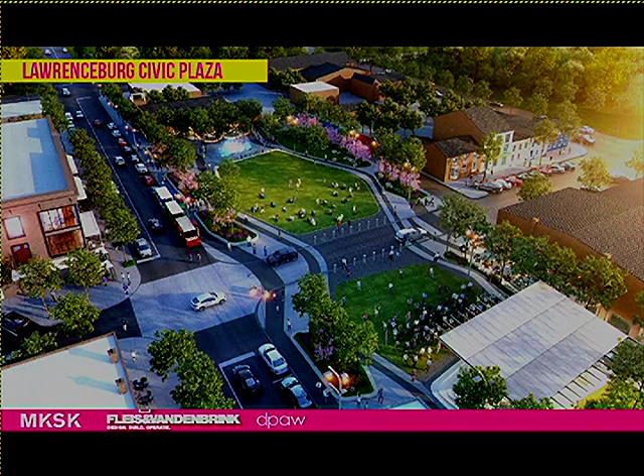The site that the project was in was actually 2 parking lots, and they utilized this for concerts. They had a summer concert series, and they really needed a space not only to host those events, but also for daily activity and just green space—kind of the lungs of the downtown area.

So we went through a process where we developed 3 different ideas, working with the community, kind of inspired by it being a river city, inspired by the way that the water flows through the area, through the sound that flows through the space.

Without getting too deep into that, these are some of the design ideas, and these are some snapshots from a couple weeks ago on site that I took, beginning to look at water features, how we deal with trees in an urban area to ensure that they're going to grow in a healthy way.

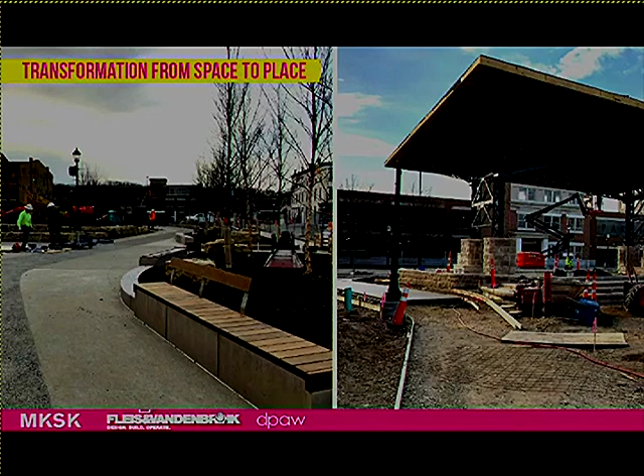We also had a stage here. I say stage because that's kind of a recognizable word, but we designed it as a pavilion so that when an event wasn't going on, it didn't look like an unused stage. It invited people in, so it really took some cues off of some of the river traffic, the railroad bridges that go over the river, beginning to reflect some authentic character in the area.

Another park is Livingston Avenue. Our Casey Elmer, who's with me in our Louisville office and will be critical on our design team, was a project manager for Livingston Avenue Park.

This park is not only one that you participate in, but it's also something you look down upon as well. You can see the tall building next to it, similar to the city center that's next to our site here. So it's not only something beautiful to participate in, but something to look at, and also reflecting the community. There used to be a park here.

It had since been developed around and had been impacted until we got involved in beginning to reflect the history of that park. So we have signage and wayfinding in-house that we've also got some hours for on this team to participate, and if there are stories to be told, we want to figure out a way to get those integrated into the project. So we think that was something of interest to that project.

U Square, downtown Cincinnati, a little bit different because this is a much more dense site, but it had a very aggressive program. How do we begin to develop a space around a program that's both flexible and engaging?

A few of the project images here show how it acts both in the daytime and the nighttime, how it embraces not only just a few people but also a crowd of people. This is adjacent to University of Cincinnati, so it has to embrace the crowds of people before games, the tailgating, that kind of thing. So that was something we had to work into the program.

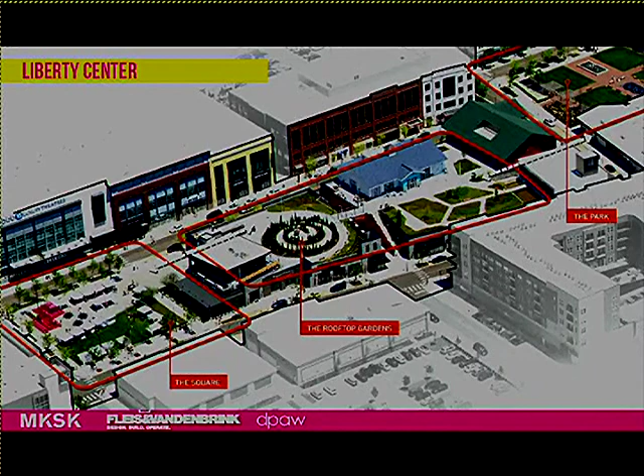Liberty Center, another project where Casey Elmer was heavily involved. I'm going to focus on the square and the park. This was a very complicated project, part of a larger development. We also did the roofscape there, but I'm going to focus on those other two areas.

We've got the park area, which involved a water feature, also some sculpture, a little bit more passive where people can congregate during eating, shopping, those kinds of things. We also had the square, an opportunity to be heavily programmed for concerts and those kinds of things. Both these lawn areas were very porous, so we could deal with stormwater on the site, which is something very interesting on this project.

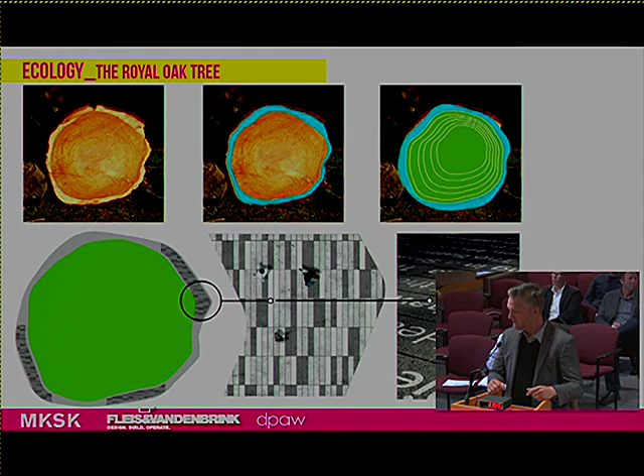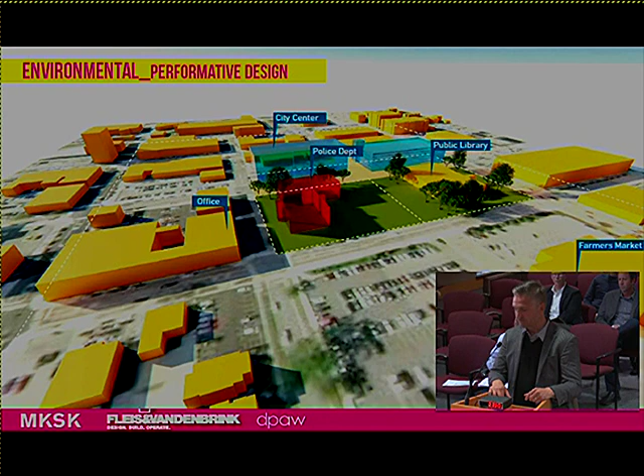Innovation and sustainability—one, there's an existing building on the site that will be slated for demo very soon. Is there an opportunity to utilize the basement space, not fill it in, and take it back out later? We could possibly use this for stormwater storage.

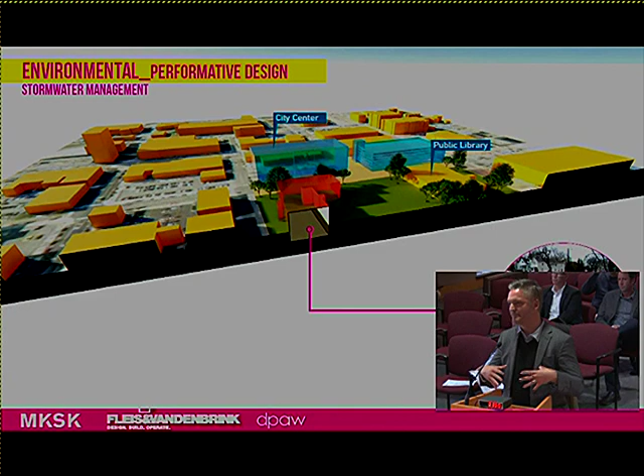One of the challenges we want to give ourselves is to create a site that not only has net zero runoff, but can also absorb rainwater and stormwater from other sites. Most immediately adjacent would be the streetscapes, but what other areas could we also plug into? That's something we'd want to work on not only with our project and the task force, but with other folks developing around us.

Tree canopy—obviously the urban heat island effect. When you look at Google Earth, you see a lot of gray, kind of void of green in that area. So this is an opportunity to insert a lot of green, so it acts as a magnet. A lot of our green urban parks operate as an anchor not only to downtown areas and the people there, but also to future development. So that's something to think about, and its importance.

Also habitat creation—little things you can do, like putting milkweed in a wildflower area, now you're pulling in butterflies. That's an additional layer that's not only helping the environment but is also educational, something you can come and watch during the seasons.

Social—number one, there's daily activity, right? People are going to come use the space for lunch. I'm starting to show there just some placeholder things with the blue ring that goes around.

Maybe that's kind of a reflection of that tree ring, that circular path. We've got a few yellow paths through there that may reflect something like a crossroads from some Native American trails.

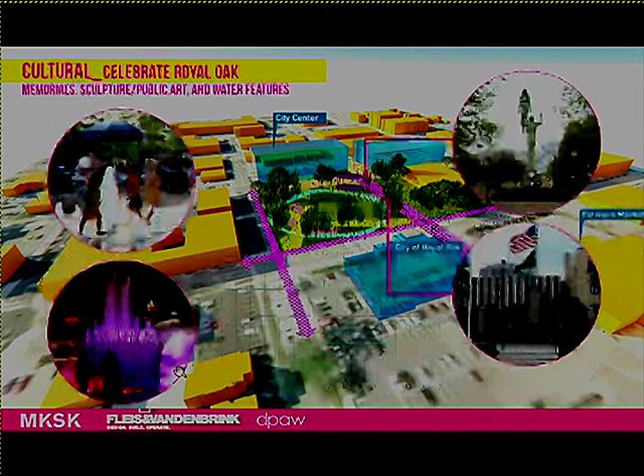Also, the cultural components—there's the Star Dream, and we've got the Veterans War Memorial that are there. We'll work with the task force to determine if those need to go exactly where they are. It's fine if it does. Those are just some of the design discussions we'd like to have.

But also, what are the other components that could add to that element of art? And the dynamic quality—is it a water feature, or is it more public art? We think that would really help the dynamic quality of the space.

And then in terms of activation, sometimes there's a long waiting period between when the public sees the last image and when the ribbon cutting occurs. Is there an opportunity to capture their imagination during the process?

Maybe it's rotating kiosks and things that happen next to the library, or maybe it's art that gets put on the fence. I know the fence around the city center building has a lot of imagery. Maybe there's an opportunity to get local artists involved, and they begin to paint that canvas on the outside. So that's something we were interested in, along with having a healing ceremony.

We think that could happen on day one of the project, where we go around with a group of school kids or whoever makes sense and inventory the different insects and leaves that are here, then document that over the course of the project and construction, and see tangible results of the impact we had—improving the downtown area in terms of wildlife, and not only that, but our spirits too. So I think that could be of interest and get people involved in the process.

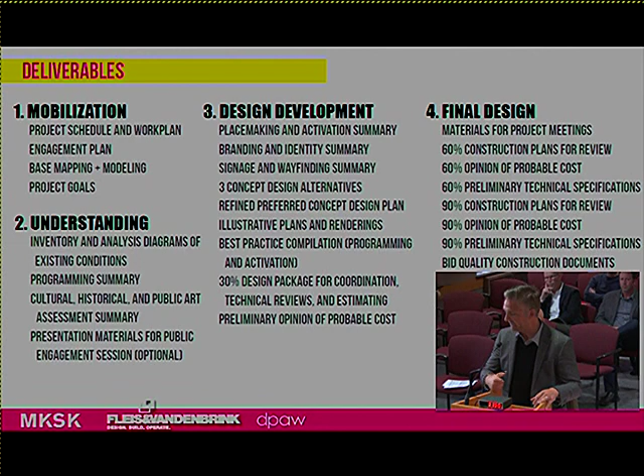I've got a few other things like placemaking and an activation summary. If you guys have questions, I don't want to get into that because I think I'm close to my 20 minutes, but I'd be happy to answer any questions. So, with that...

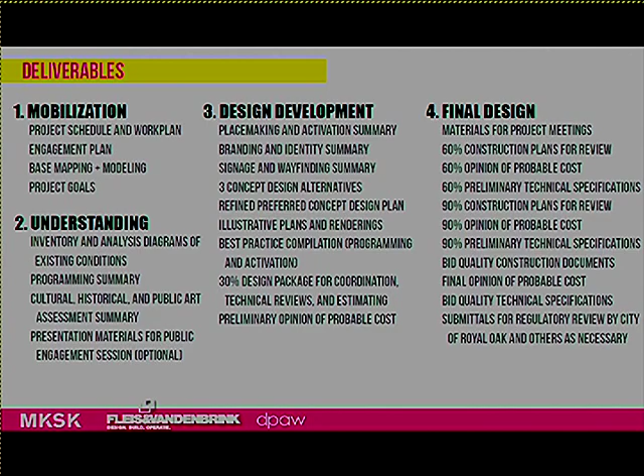Good job. We can all take a deep breath now. Water—thank you very much.

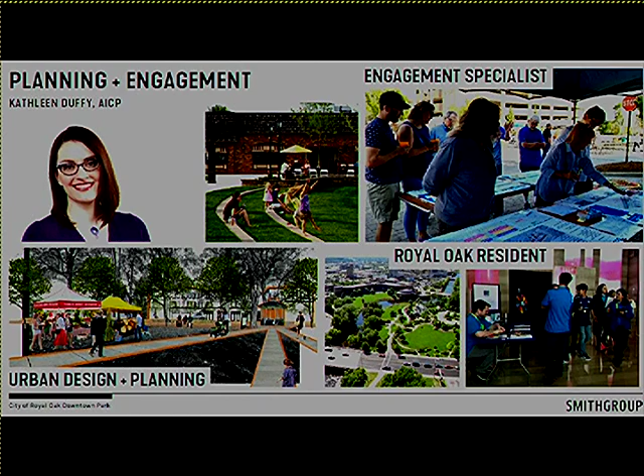Our civil engineer, Jackie Young, is an urban green infrastructure specialist and just really innovative and great to work with. A creative problem solver. Really glad to have her on the team.

And lastly, Patrick MacBride. He's not here with us today, but he is also an integral member of our design team. As a lighting designer, he brings that extra special level of magic to the site to really create another layer of interest.

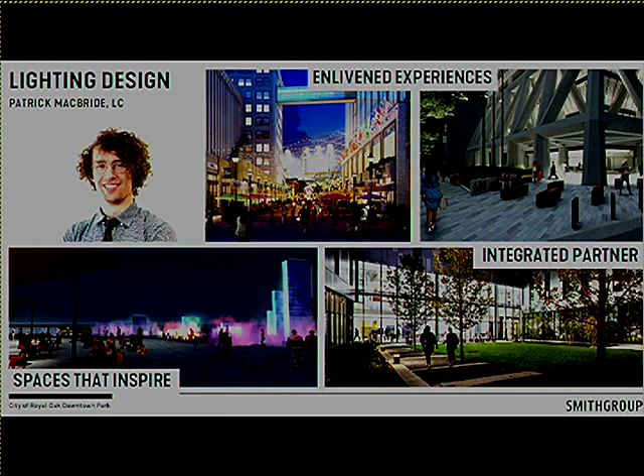I want to talk a little bit about how we approach design in general, in response to some of your questions, because gathering the historical and local context is a really key part of what we do. We have a phase of our process that we call Discover, which is about absorbing all of this information. We have people who can absorb that on a daily basis in-house, but we also have the ability to use the tools you've given us and more broadly dig into the research to help find those things that inspire the design.

Then we start to interpret all of those possibilities, the complex site analysis with the historical meaning and some of the larger vision, and translate that into a series of ideas that we can explore with you. We bring those ideas to you, get and collect your feedback, and it's a continuous, iterative process that relates that back into a design. So in the end, when you see the design, you feel like you're a part of it, and we believe it's something we've all created together.

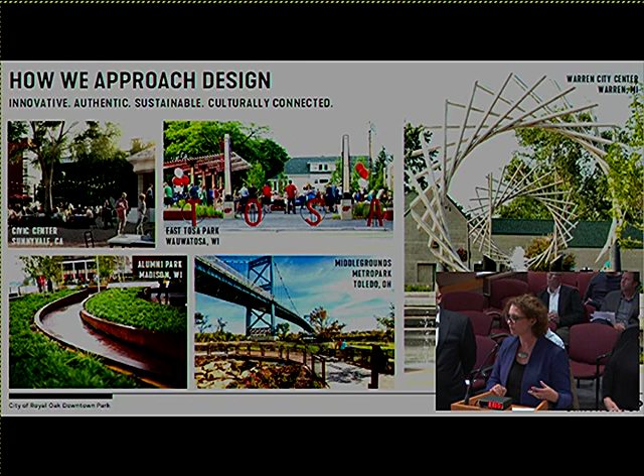In the end, we want something that's very detail-rich, very well-crafted, and has the legs to last and stand the test of time. SmithGroup is one of the oldest architecture firms in the country. JJR, which was our site design branch, has been incorporated since the 70s. We also do projects that last. They are built to last, and our clients continue to come back to us because they know they can count on how we put projects together.

So now we're going to talk about a handful of our projects, just to touch on some of the questions you mentioned in terms of our experience, sustainability, innovation, and how we relate to the character and special places in each of the communities we work in. One example of a client that's come back to us repeatedly is Toledo Metroparks.

Smith Group has had a long and collaborative relationship with Toledo Metroparks. We've worked on small-scale projects, from small planting plans to a large-scale master plan. Today we're just going to highlight two urban parks that Lori, Allison, and I have worked on for Metro Parks. The first one is Middlegrounds, which you see on the screen here.

Toledo Metro Parks is dedicated to enhancing natural spaces, and in this project we really came together and fulfilled that vision. We created this treatment train, green infrastructure, taking runoff from that bridge in the background. We're taking runoff from outside our site and running it through bioswales and constructed wetlands. This park is located in downtown Toledo, though you can't really tell, so it gives access to the public, letting them get close and up and personal with that green space.

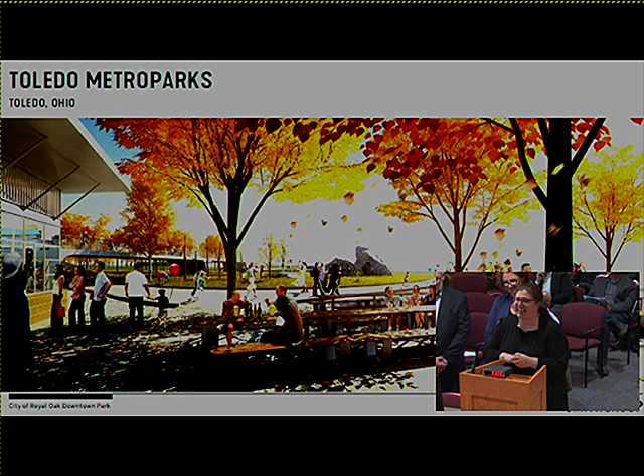We have an event lawn. We have space for year-round events for all scales of groups, all age levels. We have seasonal activities too—let me flip to the next one—ice skating, a sled hill, a number of winter activities, all within access of downtown.

Another unique thing about this park is that it brings green space to a downtown neighborhood that was really fragmented. This was an old industrial site—there was never green space here. So again, like with the first example, this really brings green space to the neighborhood.

The Little Caesars Arena in downtown Detroit—we led all of the site design throughout the entire District Detroit, which is inclusive of a whole network of open spaces that are built and designed to work together. I think the key here is about the off and on that happens in city spaces.

You have a downtown space that on some days has 5 or 10 people milling through it, and other days where you have a concert and there's 2,000 people. So designing for that flexibility and those opportunities is what happened on every square inch of the District Detroit. We did the streets, the festival streets, the plazas, the open spaces, and really made them a place that all hangs together.

That wide variety of activities and events that will occur on these streets in the LCA project—we really designed for it. We built in infrastructure such as power, water, and audio right into the streets and plaza spaces, and we were even proactive in providing extra capacity for that extra flexibility and future growth.

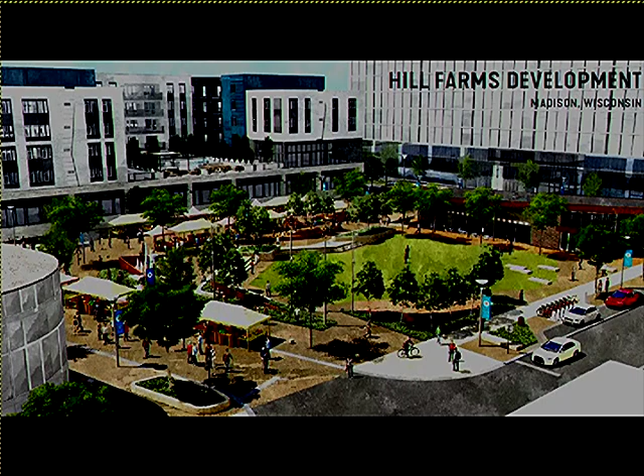Hill Farms, this is in Madison, Wisconsin. Michael Johnson and I have been working with them to create this—an entirely new district within Madison, centered around this great green space. I think what's really pertinent here is two things.

One is the role of the streets in this space. The park doesn't end at the curb—it really has the chance to expand and contract into the street, up to the faces of the buildings, and has the opportunity to grow during events and become an incredible pedestrian space.

It's also designed to reflect the larger regional context, so the design elements are all specifically shaped and molded as interpretations of the surrounding geography and geology. That's another example—of course this isn't your geology, this isn't what you would want here, but what is unique to Royal Oak that we can draw inspiration from.

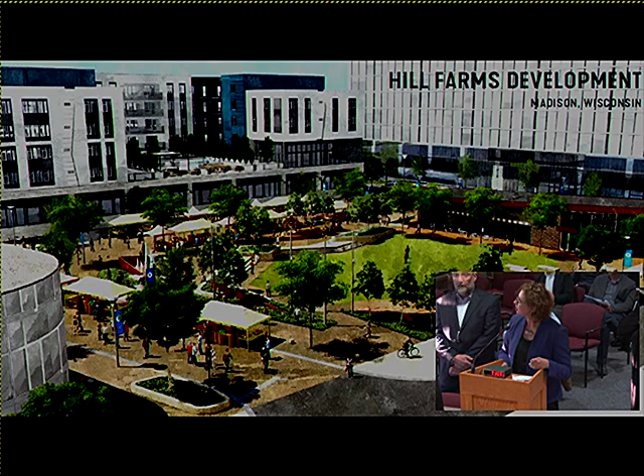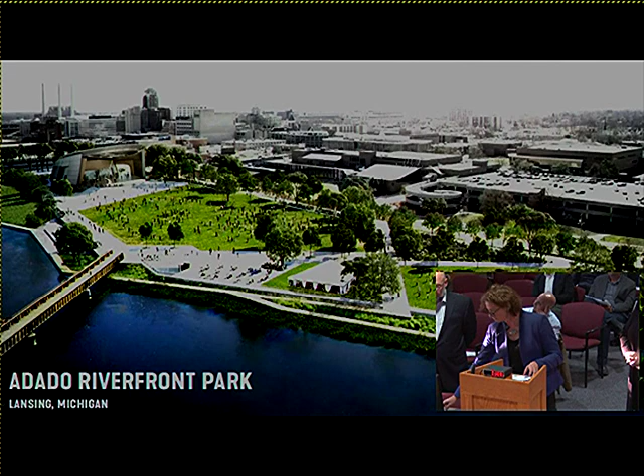We could have done this with an interpretive sign, saying here's all the stuff that happened, here's the dates, this is everything. But the idea was to actually create an experience that felt like you were discovering something, that created the sense of discovery through the experience of the place. That's the kind of thinking, those are the kind of places we like to create, because they build memories that you can't get simply by going into a nicely designed public space and reading a sign.

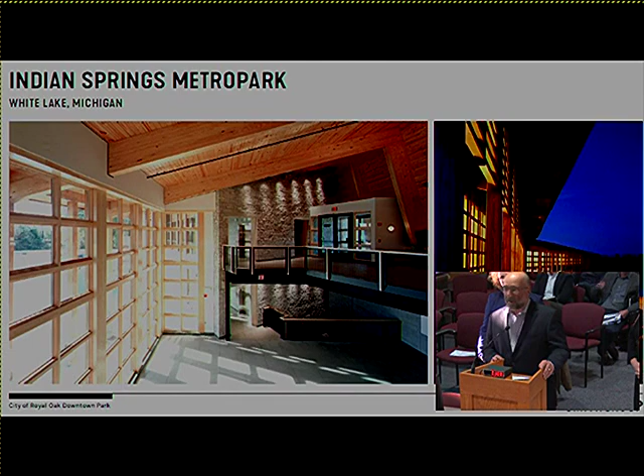And of course, how do you learn about a wetlands if you can't get into the water? So we have an underwater classroom, the same kind of thing. It's a very innovative space, but it allows for that sort of very strong connection, which is what we'll look for.

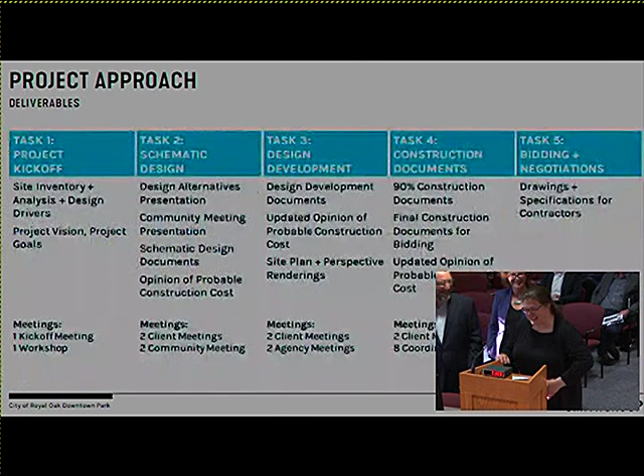So let's talk about them. You asked us about our project approach and what our deliverables were in each task. We did outline those there, and I'm happy to go into more detail, but I'll just run through it a little bit.

In the kickoff, we're doing inventory and analysis, that's our research phase, Lori talked a little bit about that earlier. Where we get into the schematic design, the design development, in those phases we're producing documents for you, with you, through our process of engagement. Those are checkpoints along the way so you can see where we're at, and we can have those very detailed conversations about where the design is headed.

You'll also notice there's an opinion of probable construction cost, which we provide in several phases. I think it's very important that we are designing adhering to your budget and mindful of that the entire process, and that's why you see that reappear at a number of key milestones. In the end, in construction documents, we're preparing those final documents and specifications so this can be bid to contractors, so your vision can be built in a way that is economical and efficient and really brings that vision to life.

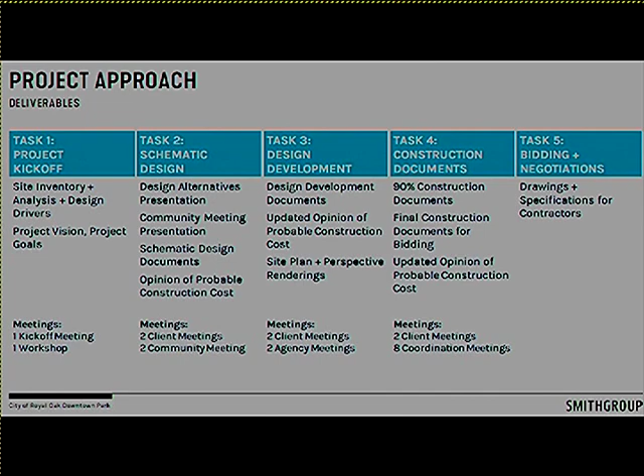When it comes to public engagement at SmithGroup, our foundational principle of how we go about the entire design process is building it on people-focused design. No better example of that is this amazing new asset where we are today. Building upon the meaningful engagement process that's already taken place, it's going to be important for us to continue to bring the public with us in the design process for something that's going to be their park, their plaza, their civic space, really the most tangible thing we use as residents — although I still have to pay my water bill and come into City Hall.

But I think the opportunity, as it will be a gathering space, is to gather people throughout the process so they can have a robust role in the design. We will base our ideas on the look and feel, but having them tested throughout the process will be really important, so we make sure the public understands: did we hear you correctly? Did we understand what you meant when you said you liked this about this park? Bringing all of that together will be really important.

As Allison mentioned, throughout the process we'll have a variety of different touch points. We love to do public engagement, would love to do a lot of it, but we want to work with you to pinpoint when it makes the most sense to have those points where the public and yourselves meet, understanding what's really working and what's not, so we don't get to a point at the end where we don't agree on what it should be. Really having that be a partnership and a collaboration that's very robust throughout the entire process is key to our engagement strategy.

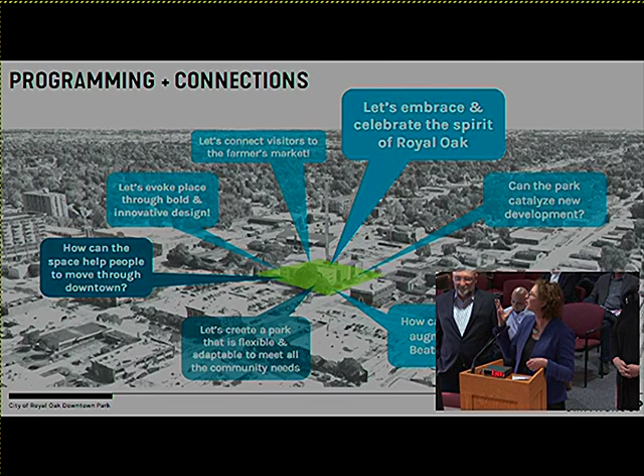So with that, we really want to start to have that dialogue with you. No design of a public park is possible without an ongoing dialogue. We already have questions and ideas that we'd like to explore with you through that dialogue.

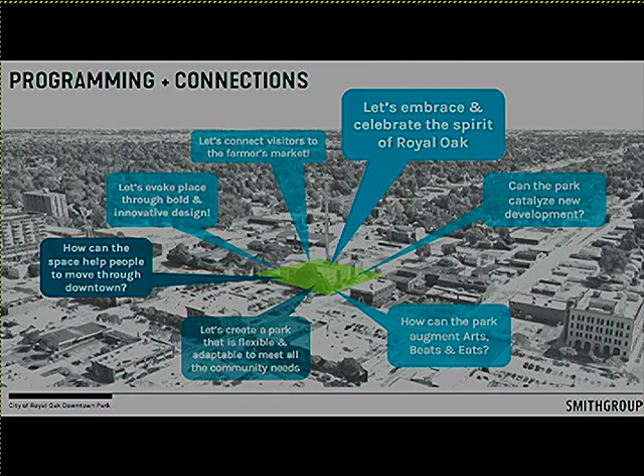Being a resident for the past 36 years here, when I moved to Royal Oak, many of you remember you could get your vacuum cleaner fixed on Main Street. Those days are long gone, right? We've gone through a grand transition from those early days and made a wonderful, vibrant community.

And right now, as we see it, we're doing that again. Downtown is getting densified. We have high-rise housing starting to come around downtown, and we're starting to develop multi-floor office structures. The more it gets densified, the more critical this park is going to be to Royal Oak. It is the urban park of downtown, and as these buildings continue to grow, it's going to become more and more important to really understand what it is we want to do and what makes it Royal Oak's downtown park.

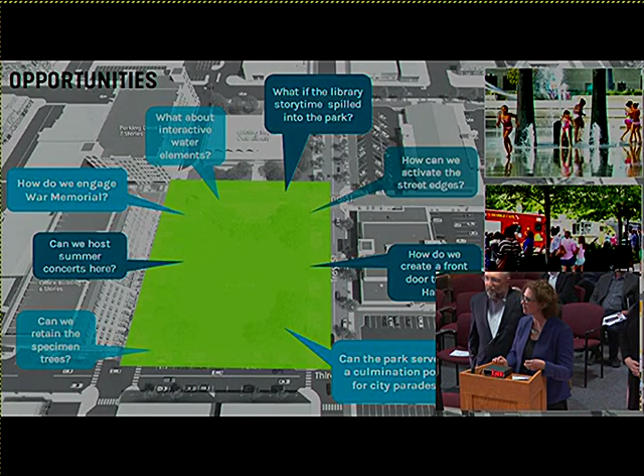We have the chance, through the process and along with the community, to influence what happens here, but we're also really interested in how the things that are already here can influence the park - everything from the special features already there and how they become reintegrated into the design, to the role of specimen trees that could be carefully protected and rewoven in because they're so special to what makes a great open space.

But really, the bottom line is to create a place that's welcoming and engaging for the community and visitors, so that everyone who comes feels that they belong. That's what a real public place needs to be. I think our MO on all of our work is to have that as the ultimate outcome - we want people to walk away saying, that place was for me, that felt right, I felt like I should be there, and I want to go back again.

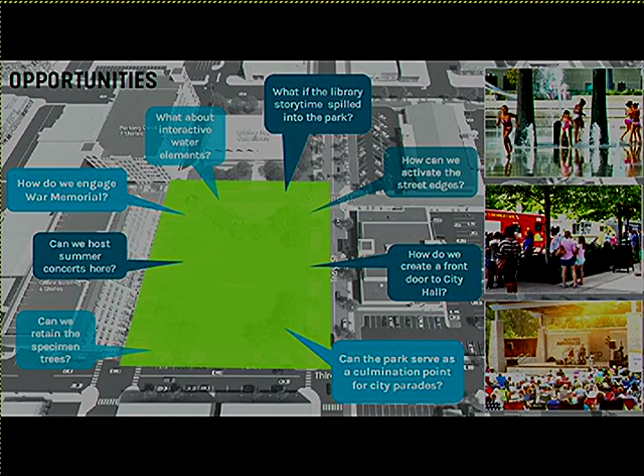So with that, we're open for questions. Thank you very much. Questions from the members of the task force?

I saw in one of your parks that you had also done some stuff with technology, like mobile apps and things like that. Is that also something that we could explore at some point potentially?

Certainly, that is an option. It's not something we've included in terms of that expertise in our scope of work, but those partnerships are a big part of it. At the District of Detroit, we explored quite a bit of that, and we also have partners across industries relative to how parking links into these things, and how programming management and schedule management works. So we have that at our fingertips - we have not included it, but it's certainly an opportunity. Thank you.

Commissioner Douglas: You're all going to hear this question from me, just be prepared. You said you like a lot of community engagement. Reading through this, it appears you have a lot already built in - and perhaps that of other members of the committee too. We've done a lot of community engagement already - we've spent a lot of time and money on it, done workshops, storyboards, yada yada yada. What you've described here, how essential is that, and is there a way we can peel that back a little bit, saving money and saving time?

I'll give you a perfect example - you asked specifically who worked on projects. This one was Mike Franklin, one of the design team leads here, so I'm going to show you some of his stuff.

This is in downtown Northville, a project that Mike did a lot of the detailing on, from a number of years ago. We included it not to say this is what we think it should look like here, but because it's really well executed. If you were to go visit it there, it's just a really successful public space in Northville, and all the details were really well done.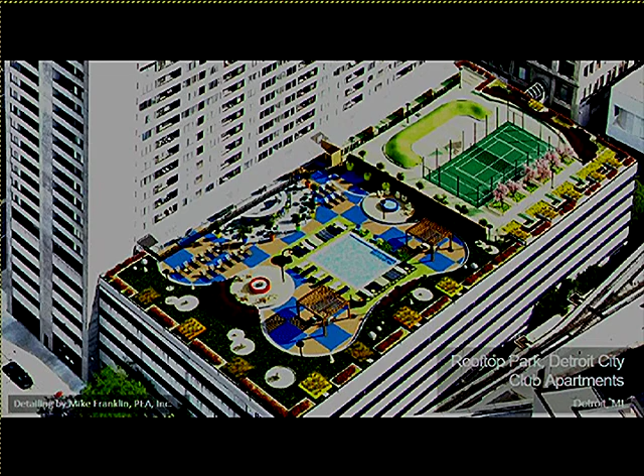But to give you an example of another one Mike did, in downtown Detroit, this is kind of an urban park space on a rooftop, and Mike was the lead designer on this and did all the detailing. It's obviously completely different than the other one, and it just shows you with design, we really respond to the community needs.

In this case, there's a younger targeted audience. Northville's very traditional Main Street - that's what the community engagement was showing. This is kind of a young urban vibe, the client wanted kind of this funky, eclectic design, so Mike executed that and did a really good job.

Again, we're not saying that this is what you're looking for. This is a very unique project, but it's a very successful space. We look at every design process as born out of going through this process and determining solutions that are appropriate for the site.

We're most excited about all the projects we have in the works now. We have about 6 or 7, actually more than that projects, most of them local here. They're in various stages of completion - some are almost constructed, some are just going under construction.

This one downtown, Riverside Park, Phase 3 and 4, is one we're working on. Again, design team - Mike Franklin, myself, Burke Jenkins - we're the design team on this.

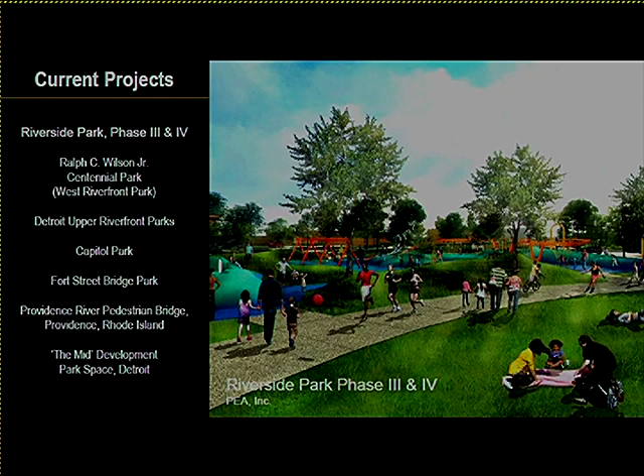It has a lot of the same components - water features, playgrounds, amphitheaters, outdoor dining, plaza space, and event space. But it's a much bigger space than this, with a lot of green space involved as well. A complicated project, and that's an exciting project for Detroit. Right next to it, literally on the other side of the Ambassador Bridge, is the West Riverfront Park, or the Ralph Wilson Centennial Park.

Now, this is a massive project. This is one of the most expensive, probably the most expensive park project being built in Michigan, and a major undertaking. So this is a really big design team. We are obviously not the only ones working on this. There's a big international design team. It's being led by Michael Van Valkenburgh from New York, but we're providing the site engineering solutions for it. And Burke Jenkins is managing that on behalf of PEA for us. And it's a really exciting project.

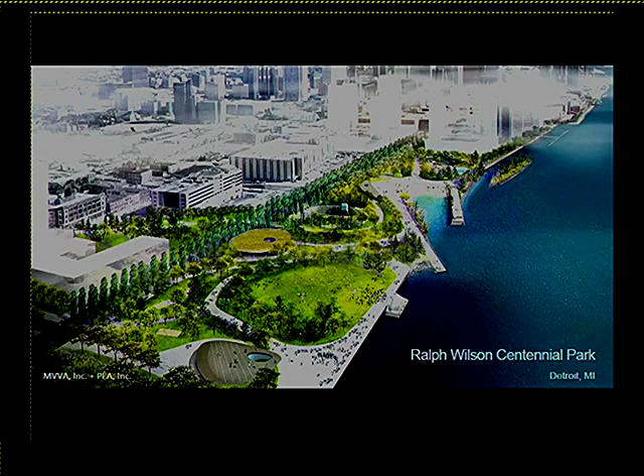And then we have a whole bunch of other ones in Detroit that we're working on. Capitol Park is right out in front of our office. Burke's also managing the engineering component of that one. And then Upper Riverfront Parks, it's actually 3 projects. We're doing landscape architecture solutions on that - Burke and myself have been involved with. That is very involved, a lot different. That's very sustainable design, using a lot of stormwater infiltration, native plantings, which could definitely be a component of your park, but it's also a major component of these parks. It would probably be a smaller component of your park.

And Fort Street Bridge, which is a fantastic project, it's wrapped up. The design, now all of our work on these is actually complete. It's just that they're coming under construction this summer. Fort Street Bridge Park is a really neat little park - some sidewalks, interpretive historic park, really great design, and also, again, a lot of plantings, rain gardens, rainwater infiltration kind of demonstration things that we'd be looking to incorporate into your park so that there would be zero stormwater runoff would be the goal.

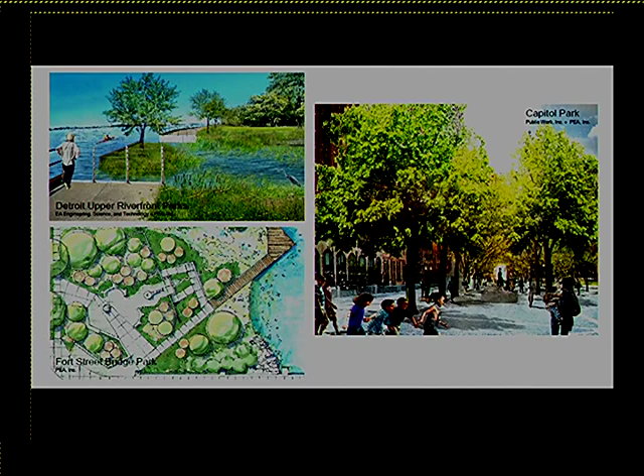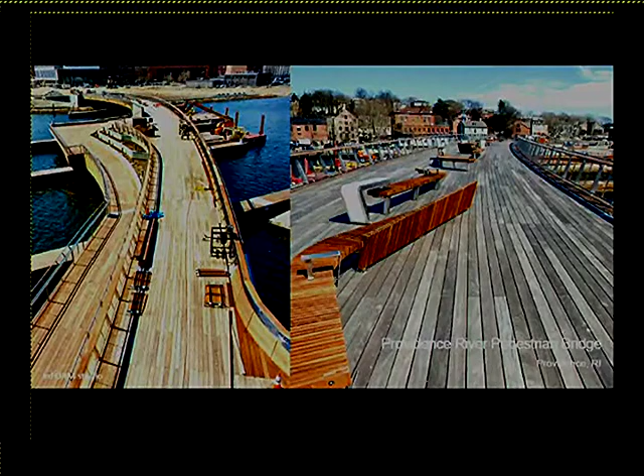And Inform Studio, this is a really cool project in Providence, Rhode Island. And this actually looks like a bridge, but it's actually like a linear park. So it's actually considered as park space over the river. There's a lot of programmed areas on this for different events to take place and activities. And again, you can see how they execute design. It's just very visually pleasing. And this one's basically complete. I would say it's going to be open a couple weeks - summer, basically. They're wrapping it up, they're just doing some punch list stuff. So this one's basically about just a really beautiful project.

So with that, I'm going to hand it over to Mike to talk a little bit about the design process and the deliverables and how we're going to go through that.

Thank you, Jeff. Thank you, Task Force, for giving us the opportunity to speak about our proposal. It's my honor to be able to represent the design team here and talk about our vision for this project. We really can't start without just having a little bit of a definition of what we think a successful project would be. And if we were to be able to get this project, it would be a design that's a vibrant people's place that is heavily used, embraced by the people of all ages, is designed to be flexible and evolve over time to stay exciting, relevant, and to be truly an authentically Royal Oak project.

And so how exactly are we going to achieve that? Well, for us, it's process. And so in our proposal, we provided you 5 phases: conceptual, schematic, design development, construction documentation, construction administration. And we're going to follow those, obviously, those phases. But we feel in that first phase, that conceptual phase, is probably the most critical in capturing really the essence of what this park could eventually become.

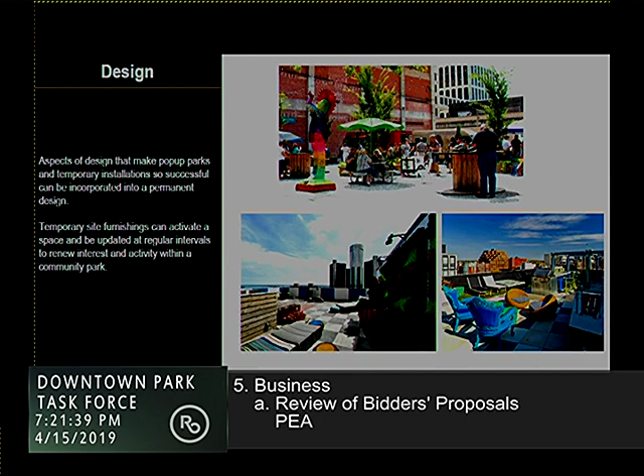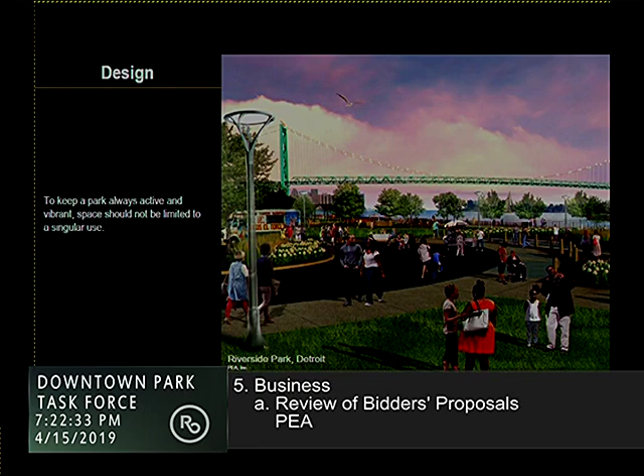One thing we noticed in the report - a great report - was the use, and what kept coming up were two parks: Cumberland River Park and the Highline in New York. What was interesting, and I'll just read it: the design aesthetic rated the highest were these parks where the design provided a balance of green space with bold, crisp, contemporary geometry that helped define the user spaces. If you look at Cumberland Park, which is really neat, they used a curvilinear shape in the pedestrian walkway to create individual spaces. In those spaces you have water features, play areas, climbing walls, artificial plant material, interesting seating areas, and composite materials you wouldn't necessarily always use.

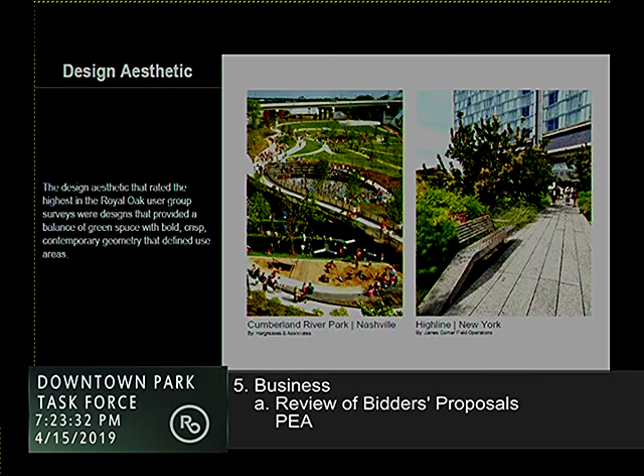Same thing with the Highline - it's just a linear space, but with very clean use of hardscape, seating, plant material, and lighting. It was well done, and these are some of the aesthetics we want to incorporate into the design we'd like to do for you.

So these are the things we'll be thinking about as we design your space - multiple uses.

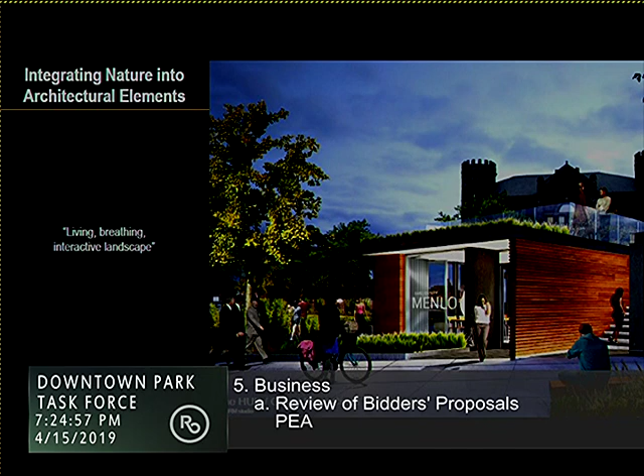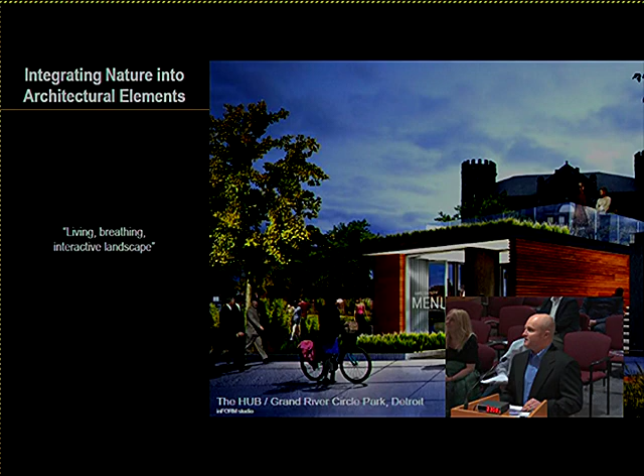Another quote from the report that we thought was really appropriate, especially for the idea of sustainability and innovation, is that people wanted this living, breathing, interactive landscape. This AIA nationally awarded project, which our partner Inform Studio worked on, really typifies that - they incorporated a green roof, the opportunity for rain gardens, porous paving, and different materials and mediums like wood and steel that could be recycled if you wanted. What's also innovative is they incorporated an interactive display wall, which can be exciting for people coming to be part of or visit the space - it's educational, interactive, colorful, bright, and exciting. It just gives a little more life to the space.

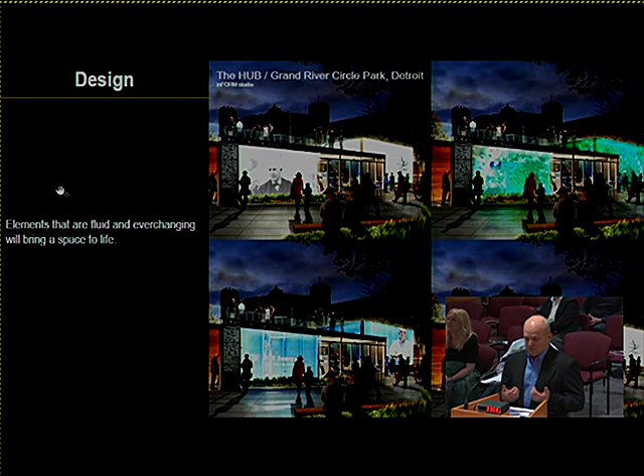Another element we'll be incorporating into our design, from our other partner Bob White with Illuminart for Beacon Park, is the use of lighting - LED, low impact, indirect lighting. Just look what it does to the space - it brings it alive and makes it very interesting for the user.

So in summary, we're wanting to develop a design that's bold, able to generate some pretty unique spaces. We'll use the introduction of light, color, texture, geometric shapes and lines to bring people into the space, and those green spaces will allow people to want to stay.

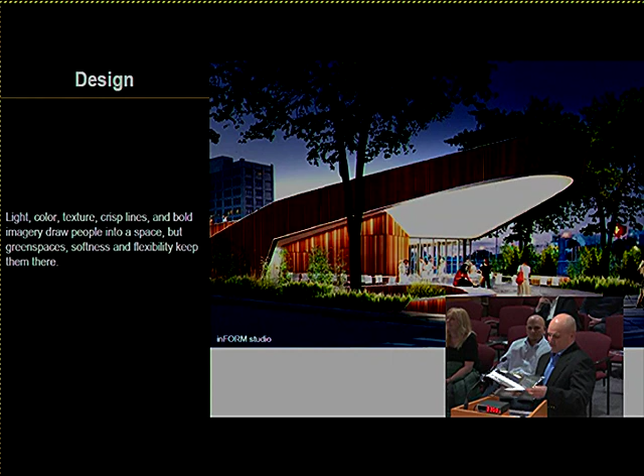To summarize, this design should evolve, it should be flexible. We want it designed for multiple uses, not just singular uses, using innovative site furnishings to make sure it remains programmed to be vibrant and exciting and alive for many years, and mostly that it celebrates the people of Royal Oak.

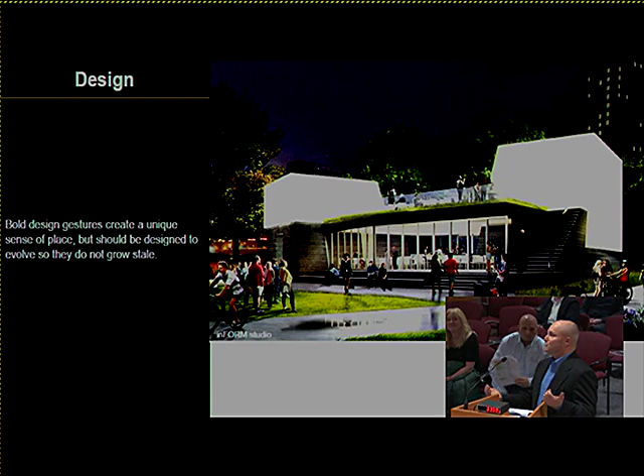I'd be remiss if I didn't mention the historical significance of elements already here. The Star Dream sculpture is a key component and would be a focal point for our design, as well as the War Memorial, and we can't forget the significance that Royal Oak is a Tree City, USA.

So historically, we'll definitely want to include all those elements into the design, but mostly it's the people we want to reflect - we think the people of this community are very interesting, and they'll reflect really the design of this space we're wanting to design for you.

I can certainly go through each one of these deliverables. I don't know if it's necessary, but I'd want to open it up for questions. If you had any more questions about those deliverables, I'd be more than happy to, or the team would be more than happy to answer them.

Thank you. Thank you very much.

We'll turn to the members of the task force and see if they have any questions on the deliverables or on any other aspect of your presentation.

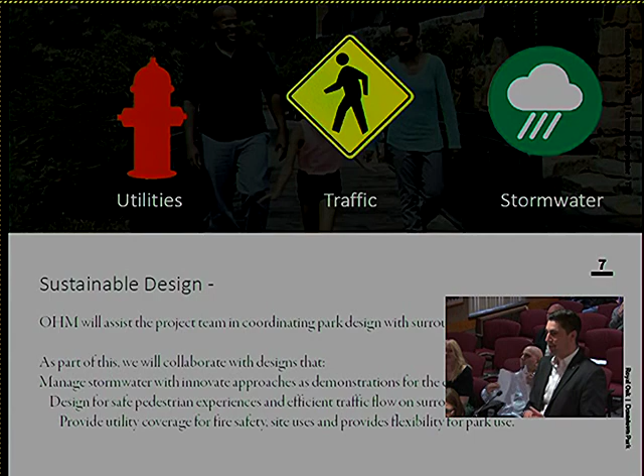As with most urban projects, they're complex in nature. While the look and feel package presents a number of ideas and opportunities within the park, there's also a lot that needs to happen below the surface. Utilities, we have to deal with the building we're going to take down. We also have to deal with stormwater, not only from the park but from surrounding properties, and use this park as an opportunity to be a showpiece for how you can manage stormwater in an urban environment. It's complex and difficult at times, but the city being a leader in this position is a great opportunity to show residents that the city is leading by example in many ways.

In addition, we also look at the utilities itself. We want to make this a park that's flexible. We want to make it a park that's safe. That means making sure utilities are in locations that are convenient, making this a park that can be used for many types of uses.

And then we also want to look at the safety of the park. We are in an urban environment. Our drivers are used to certain situations within cities, but we have people that come to the city that aren't used to it. So we want to make sure the surroundings of the park are done in a safe way, thinking about traffic engineering principles, using different textures when we come up to intersections where we have crossings you might not expect. We want visitors from the neighborhoods, including people pushing strollers, to feel safe and have an easy way to get in and around the park.

So that's the civil aspects. We also have other engineering we'll bring into this, whether it's electrical, structural, or even MEP. We have all those services in-house, which we are prepared to bring to the Hamilton Anderson team as necessary as the project evolves. Look forward to questions later if you have any on civil.

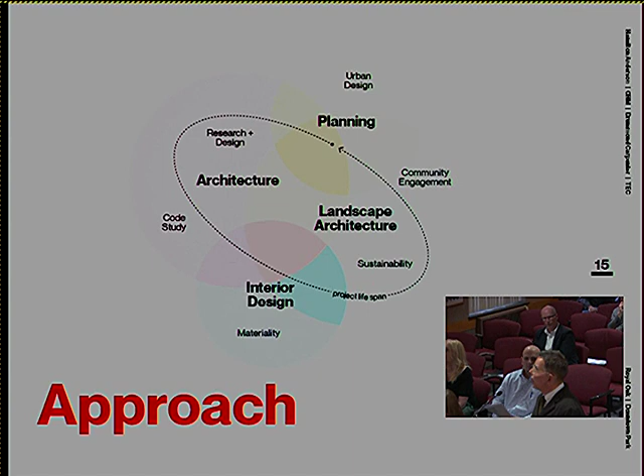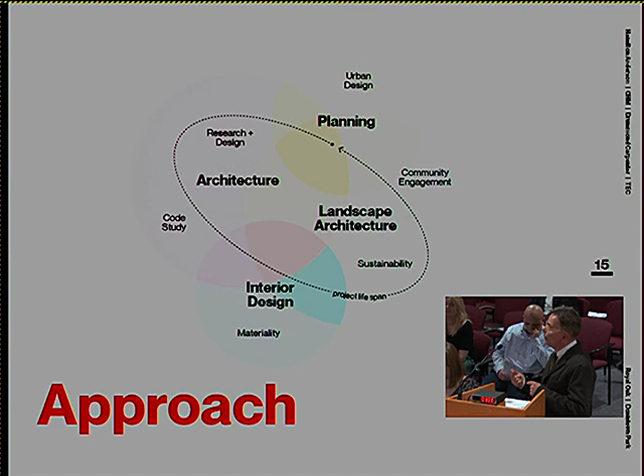Thank you, Chris. This is a simple diagram that illustrates again those four design disciplines we have within our own house: urban planning, landscape architecture, interior design, and architecture. This diagram shows how those disciplines rub up against one another, how they operate together in a truly collaborative fashion. The circular or elliptical arrow indicates that even though we're a group of constellations working together, we're also moving forward—we are a dynamic institution, and that will produce some very positive outcomes for us.

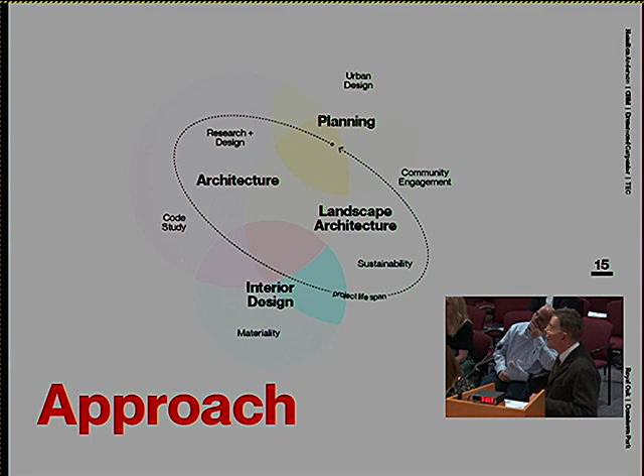There are a number of projects that Hamilton Anderson can share with you tonight. As I mentioned, we've been practicing in the city of Detroit for over 25 years, and many of these projects are in municipalities just like Royal Oak. These are some of these legacy projects.

Clinch Park in downtown Traverse City. Washington Boulevard in downtown Detroit, right along the western edge of downtown. Elmont Park, a park whose size and sense of character is a fairly nice comparable to the size and character of what could be the Royal Oak Park.

And if you want to talk a little bit more about your work, Megan? Yeah, I'll take care of that. I'm Megan, landscape architect with Hamilton Anderson. I think we have some amazing and beautiful legacy projects through Hamilton Anderson, and we wanted to speak to how that legacy has attracted new talent to our firm, one of them being me—I moved here from California a couple years ago. I'm a resident of Madison Heights, and I'll be working with Chris Rigert on this project.

I wanted to speak to a couple of projects of comparable scale that I've worked on during my time in California. One was the BART Lake Merritt Plaza, a subway station at the heart of Oakland, California's Chinatown. This had a diverse stakeholder group—it was a transit authority property, but the city was obviously a stakeholder, along with the business community, a community college, and multiple different communities, not just Chinese or Chinese American residents but from all sorts of Pan-Asian communities. We did an extensive amount of community engagement around this, building off preliminary work that the subway transit system had already done, in similar fashion to what we'd see doing here.

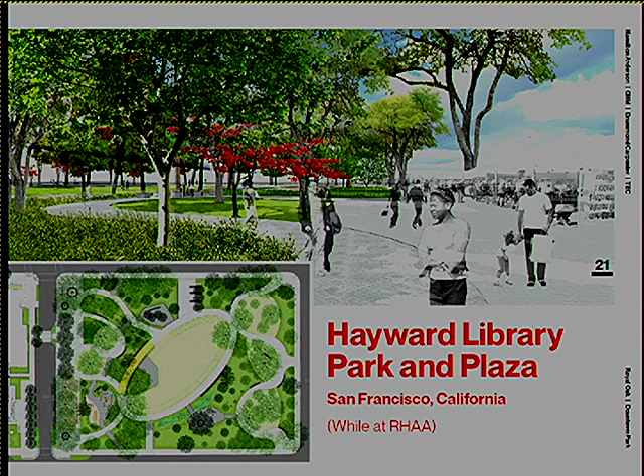Then there's Hayward Library and Park and Plaza. I see a lot of parallels with this project because it was a historic library site where they determined the library program they needed to expand couldn't work on this site, so they moved it to an adjacent parcel, which gave them the opportunity to turn the existing site into a park. They built a net zero building that's going to complete construction soon, and they'll begin site construction—similar to what the gentleman from MKSK introduced in the beginning.

We're converting that basement into a rainwater catchment reservoir. All the rainwater catchment from the buildings is going to be recycled for toilets, but also for irrigation of the site. Being in California, there are also very extensive stormwater and green infrastructure approaches on that site that I'm very familiar with. It's also a historic arboretum, so there's a strong balance, as you can see in the plan, between a civic gathering area that we had to wedge in, as well as lots of intimate spaces where people can rest, relax, and have more passive enjoyment of the park.

Are you using? Yeah. Thanks, Megan.

Let's go through a couple of more current projects offered by Hamilton Anderson Associates tonight.

One is the master plan and landscape architecture design for City Modern Detroit, which is under construction as we speak. It's located in historic Brush Park. The notable component of the landscape architecture we brought to this neighborhood is the Mews, a pedestrian-only meandering path cutting right through the heart of this development, which will eventually connect to a new development just south that begins construction next year.

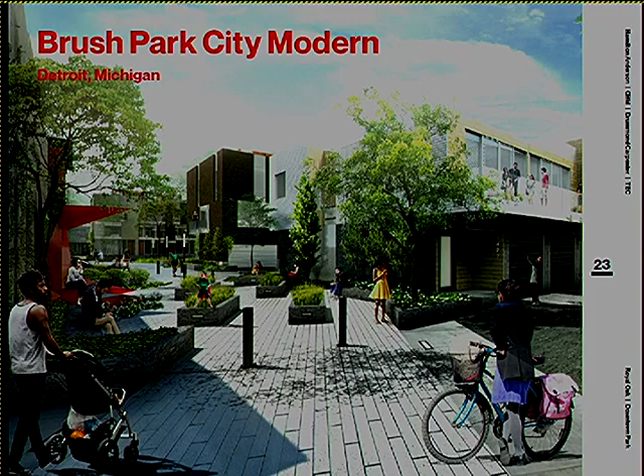This shows you the scale of the Mews, and the quality and intimacy of those spaces. But we also created public spaces for Brush Park City Modern by capturing outdoor space within the second floor of a brand new building called A6. You can see this is an outdoor plaza raised up off the street for the homeowners within the entire development at City Modern Detroit.

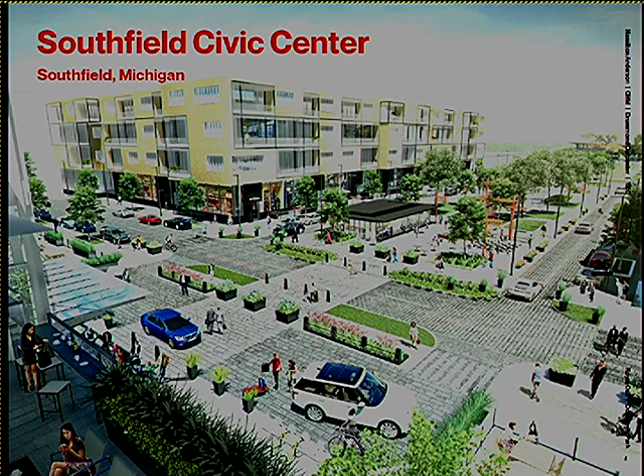Our friends in Southfield commissioned Hamilton Anderson to help them understand what a piece of land across the street from their city hall and library could become, and how they could sell this land to achieve the maximum allowable price. So they asked us to present the highest and best use of that property, and this is our snapshot of that potential development.

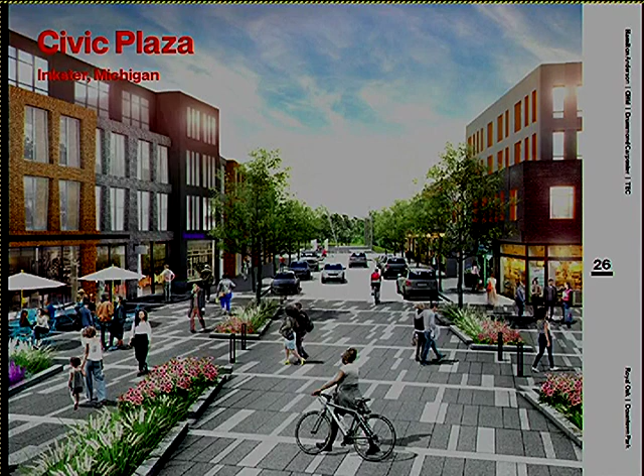Similarly, Chris was directly involved in the Civic Plaza for downtown Inkster along Michigan Avenue, where there was potential for development. We created recipes, if you will, for mixed-use developments that would add density and character to an otherwise vacant site, while privileging outdoor community space and park-like spaces for this new development.

And then I'm going to bring back Megan, because this is one of her favorite projects. In 2017, Hamilton Anderson developed the Parks and Recreation Master Plan for the city of Ferndale, as well as a master plan update overall. In 2018, we were awarded a contract as their on-call landscape architect for their entire Parks and Rec system.

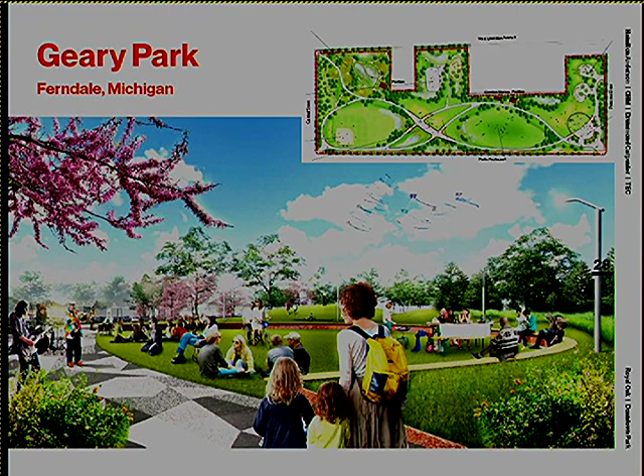A few projects here that we are working on with OHM. As Patrick said, we do work very closely and have a strong team dynamic. While these projects may not be direct analogs to the type of project we're undertaking here, I think they do represent our integration well.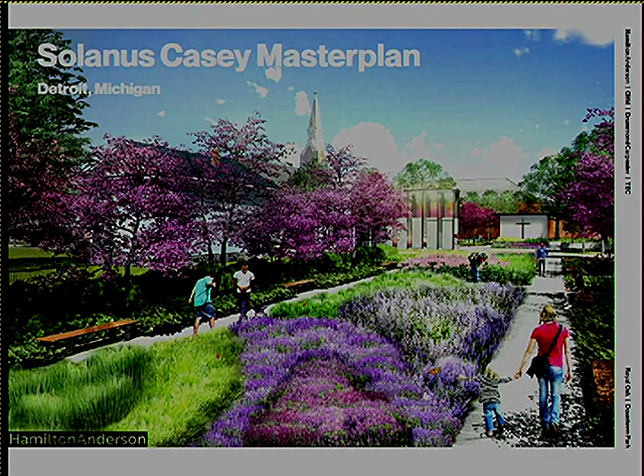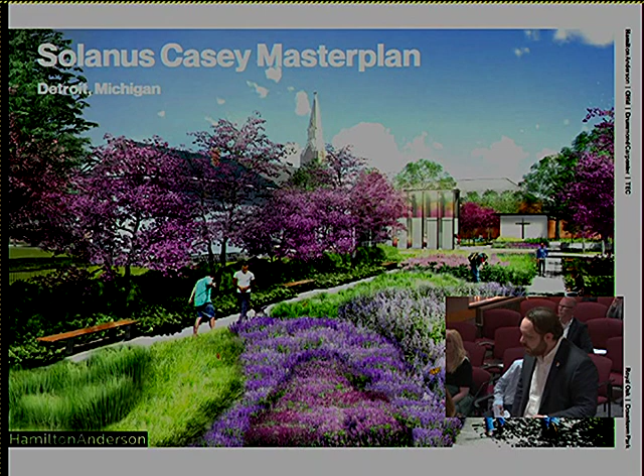This is a rendering from a master plan we're developing for the Solanus Casey Center in downtown Detroit, or excuse me, on the Near East Side of Detroit. It's really a master plan to expand their campus and integrate properties they own throughout a heavily impacted neighborhood, to stabilize the neighborhood and activate the landscape to a higher and better use. This rendering shows a broad strokes landscape treatment that connects a future greenway into the Solanus Casey site.

We're also working with OHM right now on a project with Wayne State University, their student housing project, an 860-bed apartment building that is almost fully complete right now. They're pouring concrete—they were pouring concrete today, so this work is underway.

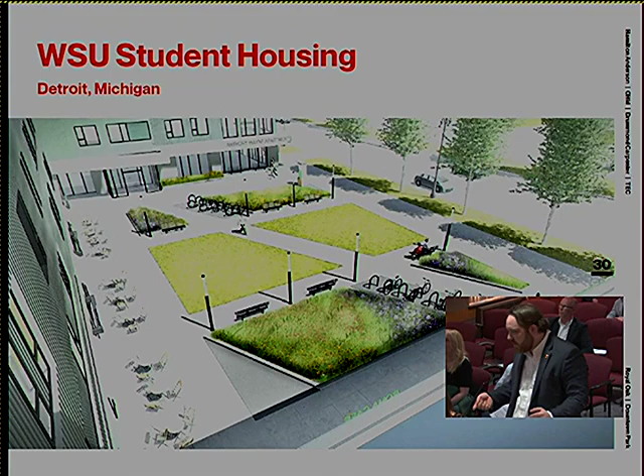I enjoy this project because it showcases well our integration of architecture and landscape. There are a lot of opportunities for indoor spaces to spill out into outdoor courtyards, such as this courtyard, which is really for commercial businesses, and the next space, which is more student circulation.

I'd also like to quickly hit on innovation and sustainability. We try to bring innovation and sustainability to every project we work on, and I'm ecstatic to see that's a priority for the task force. We see a lot of opportunities for this site to manage not just itself, but also the surrounding buildings, integrating the library, new construction, and city hall into managing stormwater from those sites, potentially procuring solar energy from rooftops to power this park, and integrating green stormwater infrastructure.

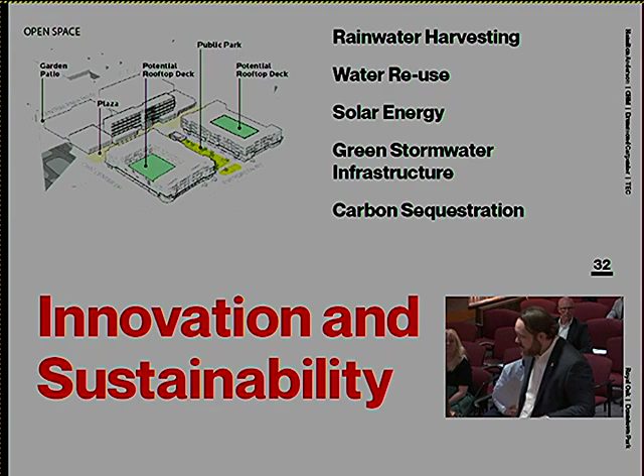And with that, I'm going to invite Don to say a few words about some of the work he's done and what he will bring to the team. Thank you, I'll be brief.

One of the questions we've heard before is, how does your team come together, how does your team interact with each other? As far as Drummond Carpenter, we've been working with OHM on multiple projects the last couple of years. Right now we're working on the Huron-Clinton Metro Park Authority Master Plan, Stormwater Master Plan. We're also doing green stormwater infrastructure site assessments with DWSD. So I've got a multi-year history with OHM. And Mark Farlow and I have a multi-decadal history teaching studios and courses at Lawrence Technological University, so we've known each other for quite some time as instructors.

As far as my familiarity with the city and what I'm bringing to the team, I was born in Royal Oak in 1971 and grew up at Woodward and Lincoln, so there's a lot of people in the room who have a long history with this community. More recently, I was co-author of the Royal Oak Green Infrastructure Evaluation Report, and the last time I had the pleasure of speaking in this opportunity was documenting where are opportunities to use alleyways, parks, or parking lots and convert that to green stormwater usage, to keep water out of the system and alleviate some of the flooding and issues happening with the regional drains.

The other project we recently did here is part of the green infrastructure implementation. I did a community focus group in conjunction with engineering and the Environmental Action Board up at the Senior Civic Center, where we looked at what kind of GSI projects would be favorably received in the park projects, like what parks could be modified. So that was a recent project we did here as well.

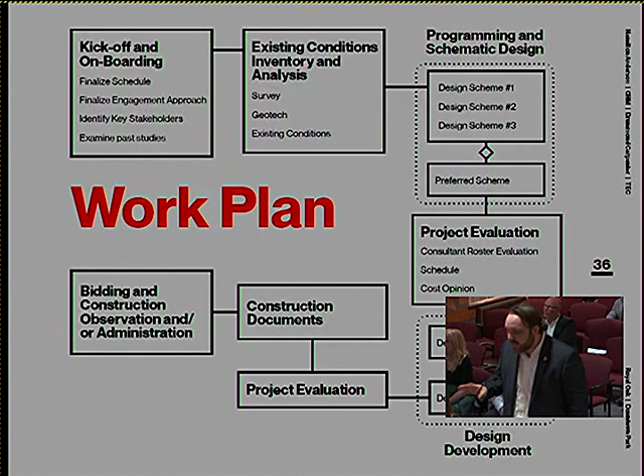So I want to quickly go over the project execution. If we go to the next slide, this is our high-level work plan of how we would execute this project. From the outset, we would work very closely with you and your partners to modify this plan to meet your needs. So this is just an outline, but we would begin with a kickoff where we would finalize our schedule, our engagement approach, and identify any stakeholders we need to bring on board.

We would conduct our site analysis, and proceed into programming and schematic design, where we would develop three alternatives and hold a community engagement session to receive feedback on those. We would then refine our plan and pause for a project evaluation milestone.

I want to pause on that to describe it a little further, which is that we work in Detroit, we work in this market, we know construction costs are astronomically high right now, we know the challenges of construction. So this would be an opportunity for us to rectify our site design with a cost opinion and rectify our schedule. We would also, at this milestone, evaluate the roster of our consultant team.

We do not have a specialized fountain consultant on board, we don't have a theater consultant on board. We have a diverse team of architects and landscape architects who are designers and problem solvers that can get through programming and schematic design. Once we understand what the needs are for this park, we would look at whether we need to bring in specialists to build a major theater, or look at an extensive water feature. We won't really know that until that milestone, and that's when we would revisit the conversation.

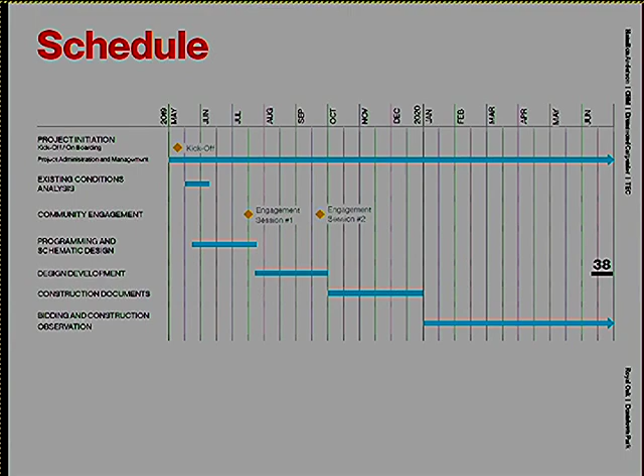We have a schedule here, which is something we would workshop with you to ensure we're meeting the milestones of your schedule. And with that, I'd like to conclude our presentation and see if we have time for questions.

Questions from the group? Commissioner Douglas. So, this is really more directed towards our staff, and I understand and like your idea of doing a midpoint reassessment to see if there are other consultants or contractors you need to build in.

We don't have an issue with vetting those subsequent vendors, do we? That was the purpose of the spreadsheet we provided you, because some people included those extra vendors and some did not. That was the purpose of the spreadsheet sent to all participants to fill out, so we could figure out who included what and who did not.

Some people took deducts, some gave us estimates of what it would cost to add. We don't have a problem doing that at a midpoint. It just requires that on a Monday night we'll be bringing you a change order. And I know how fun those are sometimes.

My real question is, should we be vetting those added vendors or contractors - and this isn't just true of this team, but any of the other teams - do we just take it at face value that they, as the general contractor, will bring in suitable people and bless that? I believe we're counting on them to bring in suitable people, and if we don't like them for some reason, I'm sure we can negotiate that as well. If there's somebody we're totally unsatisfied with, we can tell them to try again and find another vendor.

We took world class seriously because you said you wanted a park that resembled world class. So we went after those people who represented some of the best work in this area. We have Albert Kahn, Krieger Klatt in architecture and outdoor design specializing in lighting, the Fountain People specializing in fountains, and ourselves as landscape architects. That is our collective, and that's how we are going to assemble our team and work together.

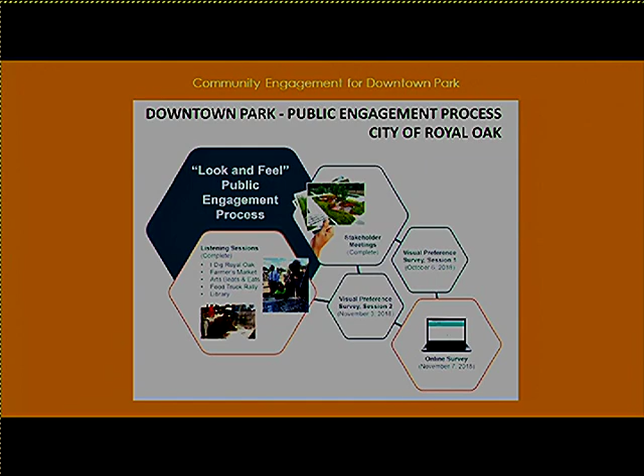We're all aware of the document that was produced, the Downtown Park Public Engagement Process. We were the authors of that, Nowak and Fraus, Landscape Architects and Planners. Through that process, we learned a lot about what your community is about and what it's trying to strive for. It also wants world class, and it also wants a park that can be humble, comforting, and relaxing. So you have a dichotomy of sorts, but we're able to work with people to achieve both goals.

Many people spoke of green spaces. We are going to bring you green spaces, the calm and the solitude of those spaces during the day. We're also going to bring you excitement in terms of a flexible space that can be converted to many different dynamics.

Our community process is not that we want to do the community engagement again, it's that we were told to do it again, by the people that were part of the community engagement process. So what we thought we would do, so as not to encumber the schedule or timeline, is reverse the process. Instead of taking the community engagement to them, which we've kind of already done, we thought we would ask the community to join us in designing the park in a truly dynamic and engaging process.

We'll discuss the character of the site and its infrastructure capacity. Nowak and Fraus have the capacity of taking care of all the engineering, survey, underground soils, and conduits necessary to run this park. We'll state the goals clearly based upon the look and feel and establish design parameters, which means taking into account budgeting. The professionals will work together to produce concepts to share with the community in a workshop.

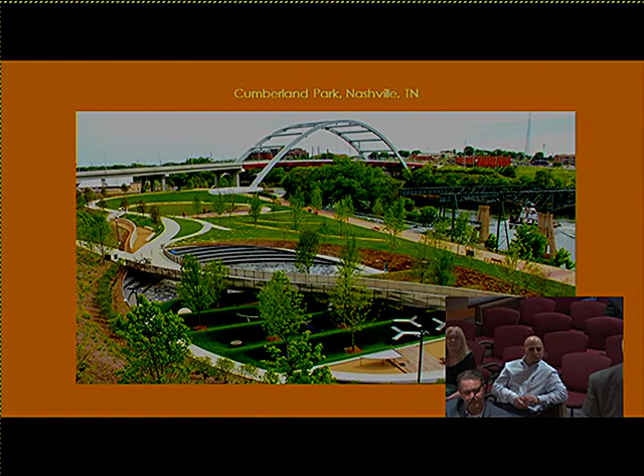Good evening, I'm Ricardo Papini, landscape architect and senior associate with Albert Kahn Associates. As you're aware, our Royal Oak project team is renowned for developing world-class park projects. I will take you through 7 significant projects from our team's portfolios that are comparable in size to Royal Oak Downtown Park, and highlight key features and attributes that have been identified from community outreach and feedback.

Our first example is Shain Park, located in downtown Birmingham. The project team consisted of members from Nowak and Fraus, Albert Kahn, and Fountain People. This 3-acre project was a revitalization and expansion of the existing park into a true town square.

We achieved that goal by using strong features such as geometrical walkways and durable paving, hardy and adaptable plant material, and sustainable LED lighting. Prominent features include a covered trellis and open lawn at the south end of the park that doubles as an outdoor amphitheater for musical events.

At the center, we converted Merrill Street from a roadway to a secured pedestrian walkway with Marshall Fredericks' sculpture, Freedom of the Human Spirit, as the central focus. A monumental fountain plaza is flanked on the east and west by war memorials, and a fun children's play area anchors the north end of the park.

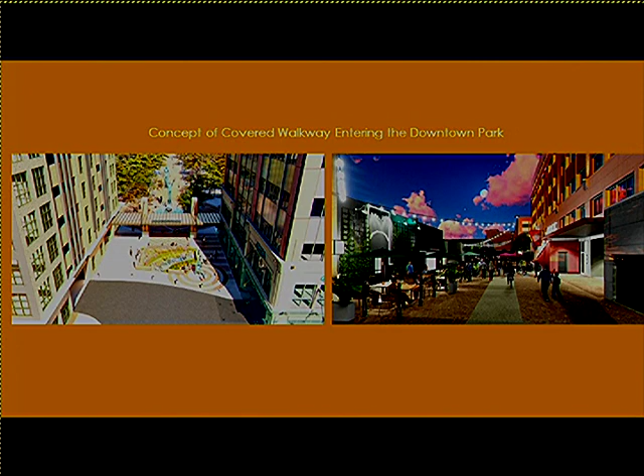These conceptual drawings were prepared by our team members, Krieger Klatt, and showcase the urban design experience with Royal Oak. The image on the left shows an innovative way they've incorporated the proposed Henry Ford Medical Office building and parking garage into our proposed project site.

What some may consider a residual space is now energized by a covered walkway that acts as the main entry into the downtown park, while framing the historic Marshall Fredericks' Star Dream Fountain. A gathering place with wayfinding signage and a rain garden further enhance this area.

The image on the right shows an urban design concept that converts the alleyway behind Mr. B's into an outdoor commercial corridor, which uses paving, contemporary furniture, and LED lighting to create an energetic and safe place during the day and evening.

Thank you. Next, I'm going to take you through the GM Riverfront Promenade, which was designed for General Motors World Headquarters located at the Renaissance Center. This 4-acre urban plaza and promenade showcased GM's commitment to reconnecting the city and its citizens to the Detroit River.

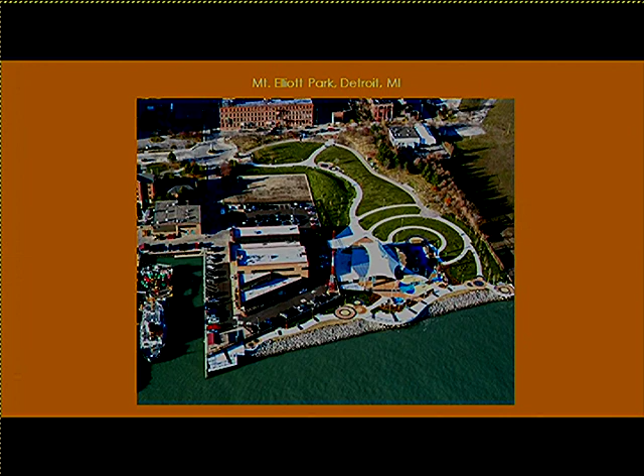Durable and simple materials of concrete, lawn, and native plants were used to create both recreational and passive spaces, seating areas, and a very popular promenade. The park's lighting was upgraded to increase public safety and encourage evening use. The promenade is heavily used for walking, running, and fishing, as well as for large-scale events and spillovers from festivals at Hart Plaza.

In closing, our team has proven experience in designing and developing innovative, world-class parks and open spaces that will fit the vision and character of Royal Oak. Thank you for your time.

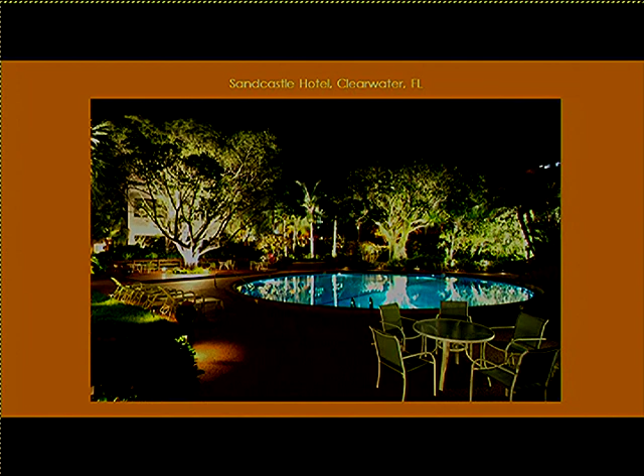A lot of these were for public parks and other areas that you're familiar with around downtown. And as you know, in Michigan, it's dark, especially in the winter, about 16 hours a day, or at least it feels like it. So lighting is a really important part of the entire process here at the Royal Oak Park.

Not only can lighting be useful just to illuminate space and create a presence of safety, but it's also useful for other infrastructure points. We can bring power to that. We can have electricity in the base of the pole, receptacles in the base of the pole, so you can plug in things like food trucks or portable vendor carts for special events.

Holiday lighting can be attached to those same poles and fed from those same electrical power points. They also become landing points for things like audio speakers and surveillance cameras, all of the kinds of things that you need in a downtown setting.

That audio, well, we're not going to go through that in too much detail tonight, is an important reinforcement to live performance. My background in theater design and outdoor theater spaces will also serve to help the team design the amphitheater and performance spaces used in the park.

I'm going to take you through a few projects I've been involved with in the last few years. This first one is a hotel space in Clearwater, Florida. Here's a relatively small plaza with a lot of buildings immediately around it. But we can avoid the view of those buildings and create a very serene garden in the midst of an urban atmosphere by illuminating the surrounding plant wall. So this is a good example of that.

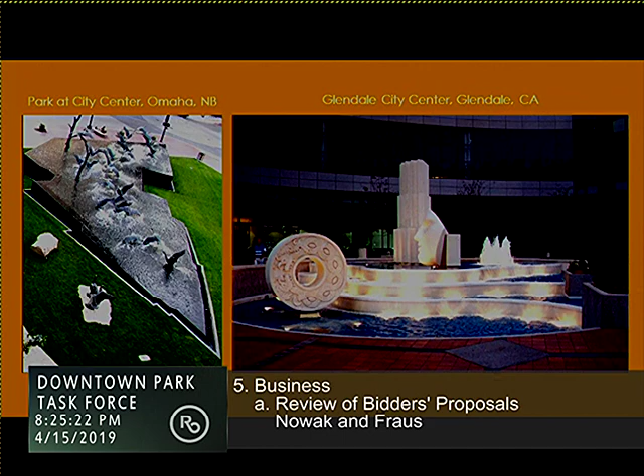Fountains can also be more sculptural, as these two examples illustrate - one in a more naturalistic sense with the geese. Those are not real geese landing there on the stream; they're all sculpted. Then there's a more abstract architectural feature. They can even become slightly more interactive, as an example of a project executed in Disneyland, where people can interact with the fountain, not necessarily get wet from it, but play with it as they walk through the water feature space. The fountain senses their presence and drops out in that area so they can pass through on dry land, sort of a parting of the Red Sea approach.